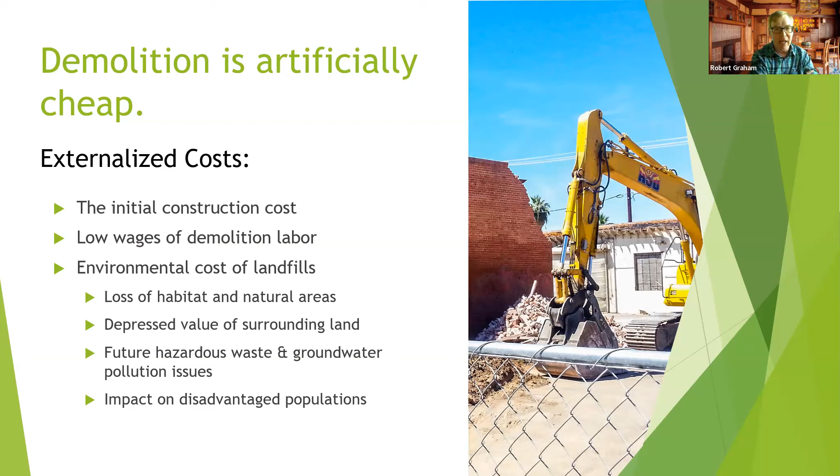So these are all societal costs that are not paid by somebody who says, I'm going to demo that building.

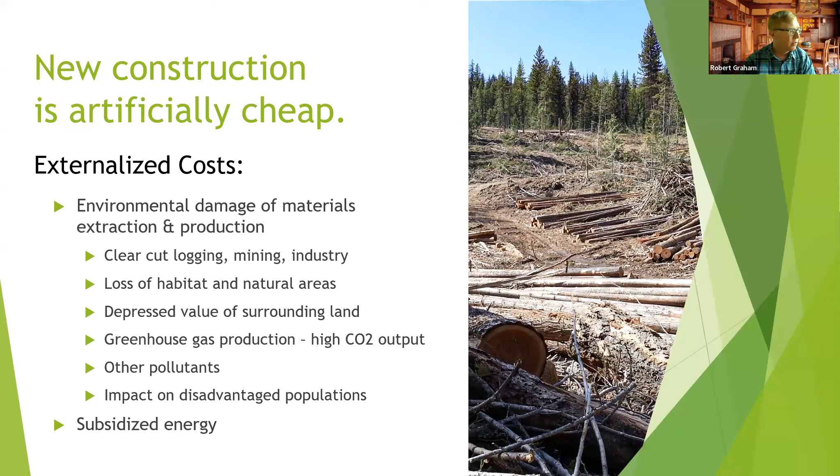It's paid by future generations. It's paid by people who are directly affected, negatively affected economically by these things going on near them. So these factors tend to underwrite the cost of new construction.

Our entire land use policy framework also is something that subsidizes new construction projects over existing projects. So we have an issue, of course, here in Phoenix, where way back in the 1970s large swaths of downtown got overzoned. By overzoned, I mean they were zoned for very dense uses that were not needed at that time.

That raises the cost of value, the value of the land, which makes the buildings that are on them less valued by comparison. When the land value starts to exceed that of the building, you're going to be incentivizing new construction over preservation, and incentivizing, once again, people to demolish buildings.

Densification, which is a perfectly laudable planning goal. Actually, that's one of the things we want to do to make a more sustainable city, is make better use of land.

But that has a side effect, as does all of the community development needs that we know. Those of us who work with city councils and politicians, we know that we have a housing crisis. We need to build housing. There are blighted areas that need to have reinvestment made in them. And cities need to have income to operate. And so all of these things, new construction is what fuels the furnace on those.

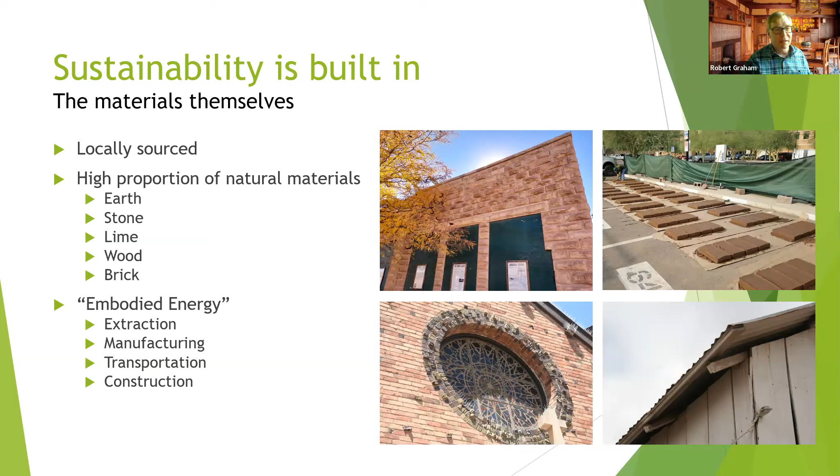Those things all have an enormous amount of embodied energy. So somebody had to cut that stone and make it into blocks, and somebody had to make those adobes and lay them out in the sun to dry. Somebody had to stoke the fires to burn the brick. All the work that it takes to cut slabs of wood to make buildings out of - that's all something that's already been done, and so that's in the building. To scrape that up and put it in a landfill just doesn't seem like a wise angle.

But it's important - these buildings all had high ceilings so that the hot air could rise in the room and make the livability of the space more comfortable. These tended to be thermal mass type buildings.

The buildings we build today are largely based around the idea of resisting heat flow. So lots of insulation - that's where you want to get your R38 roof and your R19 walls. Well, that's all an approach that has to do with trying to resist heat flow. The strategy in almost every historic building was not that. In Arizona, it was a thermal mass solution of delaying heat flow.

The idea was that the building would heat up overnight or during the day. It would take so much time for the heat to get through a wall that by the time the sun went down, it would re-radiate that heat outward. So this is the same phenomenon where you say, well gee, I walked into this old adobe building and it felt so cool. Well, that's because those walls are so massive that they never were able to really heat up during the day enough to re-radiate indoors - it re-radiates it outdoors when the sun goes down.

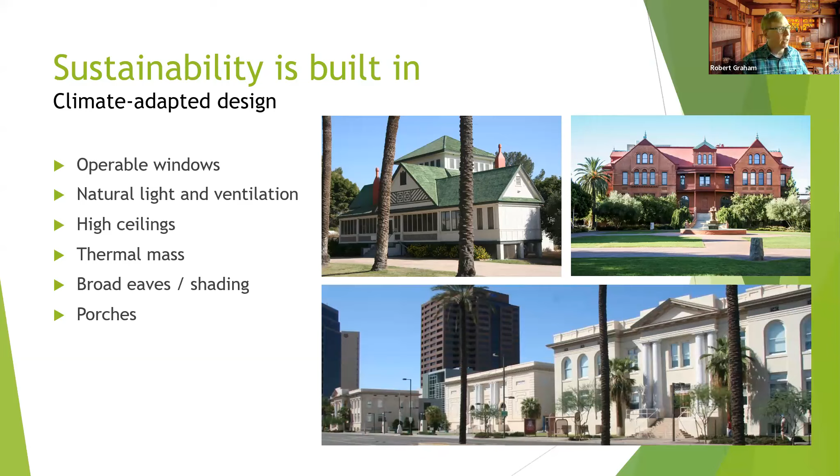Eaves, shading, porches - just a lot of good adaptive things, because if you were trying to live here once again, turn of the century or up until World War II even, these are the things you needed to do to be able to have a level of comfort in your city.

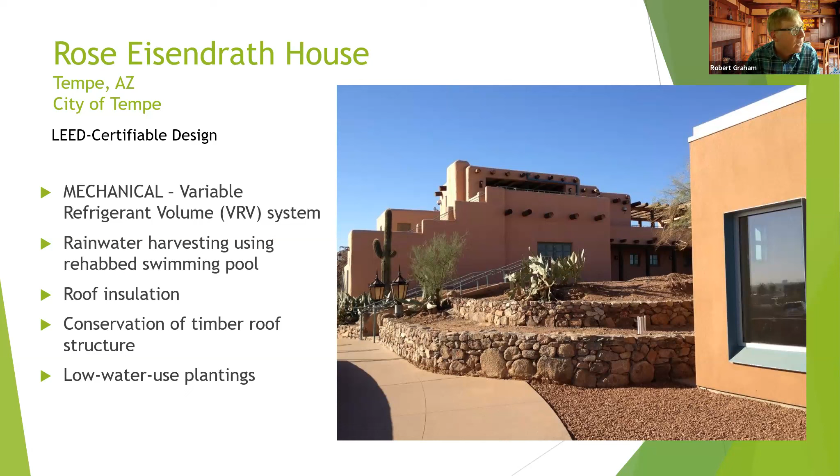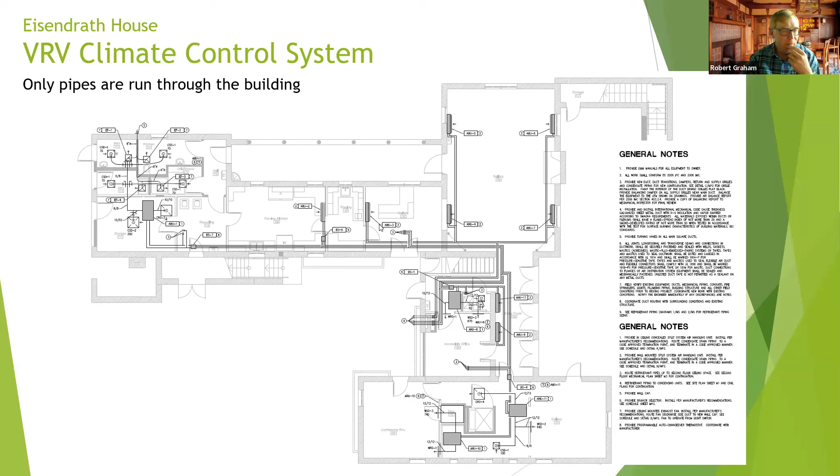We've used this system on at least 3 fairly major historic projects. These are extremely efficient systems because they even have the ability to pump heat around the building. If one side of the building, say the west side, heats up while the east side stays cool, the system can recirculate some of that heat through the piping, moving it around the building to make it more efficient, taking into account imbalances in the system. They are expensive, but it's often worth it.

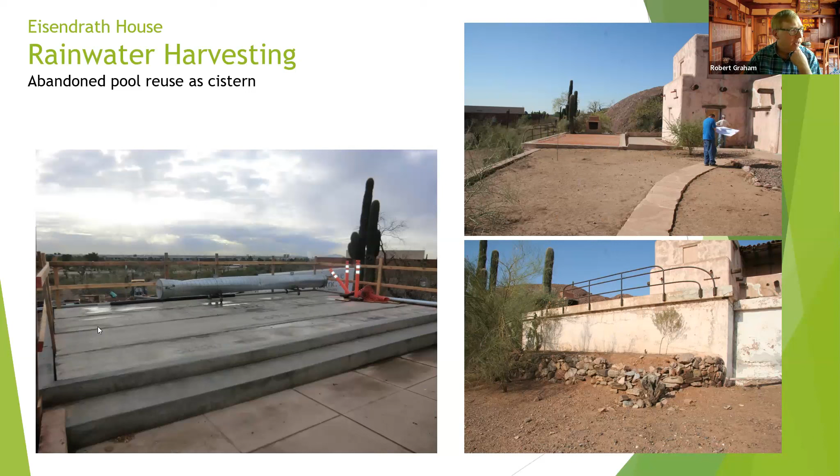We use rainwater harvesting too—how do we irrigate the landscape around this sustainably? This building had a swimming pool that had been filled in for years. On the lower right slide, you can see it's a raised swimming pool on a terrace; the upper slide shows the top of it. This orange paver material is the infill they did in the pool. We excavated that out, lined it so it would hold water, put a cap on it and a pump system, and now all the runoff from around the building and off the roofs goes into this old swimming pool before draining off to the landscaping.

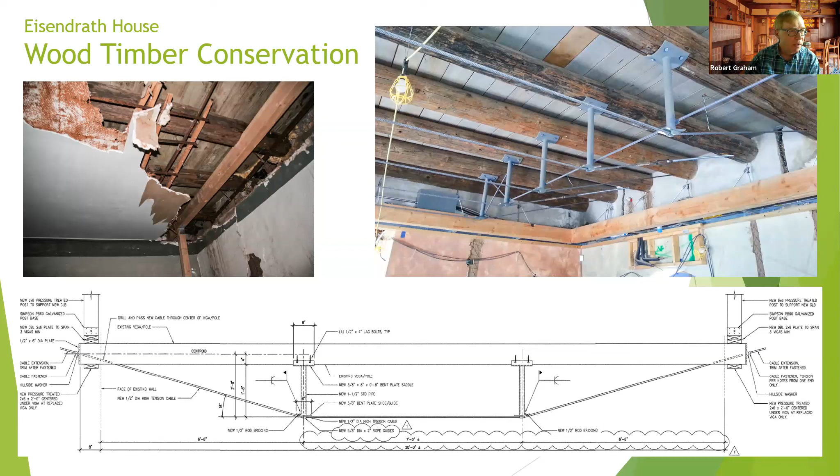We went to some unusual lengths to preserve rather than replace roof timbers. These were all undersized for the new use. We had a change of occupancy, which required higher structural loads. So we were able to reinforce what was up there with a fairly creative system of steelwork, preserving the original material and saving all the work and expense that would have gone into taking them out and replacing them.

We did some energy modeling on it, and things like that. A lot of the little LEED things you'd have in the LEED system list were actually fairly easy to achieve. But some things were not so easy to achieve—this was a roof that was on the edge of being thrown away.

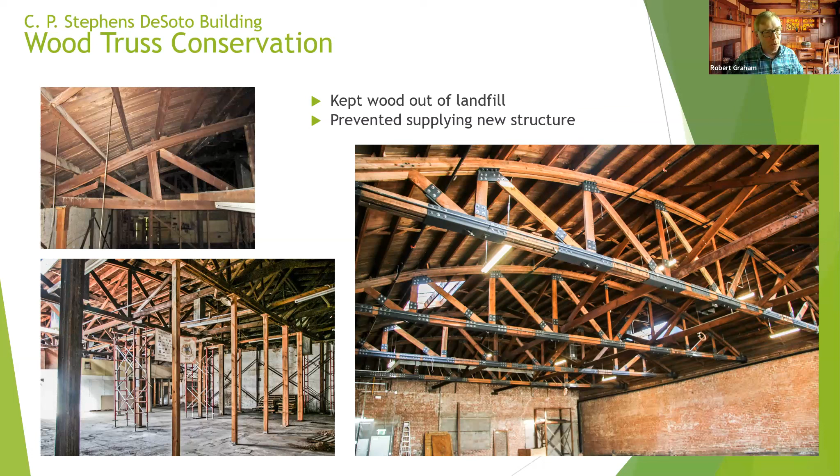But we were able to find a way to put those things back together and reinforce them with some supplemental steel. The problem with the trusses wasn't the individual members, wasn't the wood—the problem turned out to be the connections. So we found a way to reinforce the connections with lots of bits of steel, which saved all this original material, as well as the material that would have gone to landfill and the material that would have had to replace it.

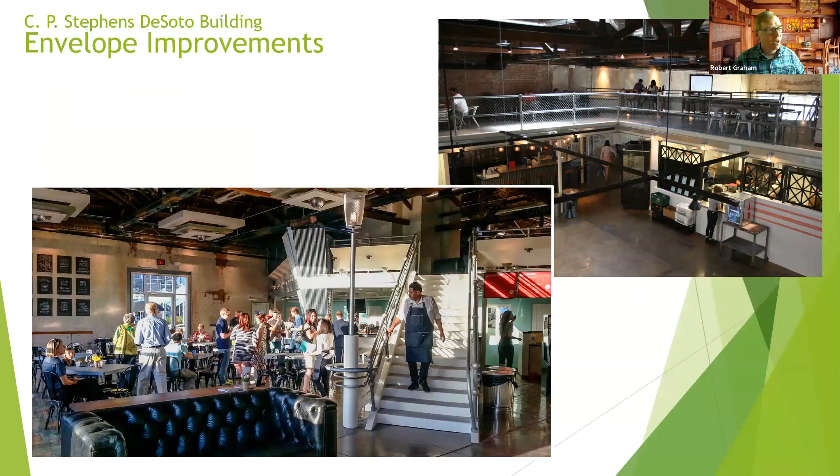Again, this was a similar situation to 22 Jackson. The exterior envelope—we were able to do all the insulation on top of the roof, so we could preserve that interior look. To cover up the interior walls in this building would have been a sin. They were just dripping with character and age.

So my essential message is that preservation is the ultimate in sustainability.

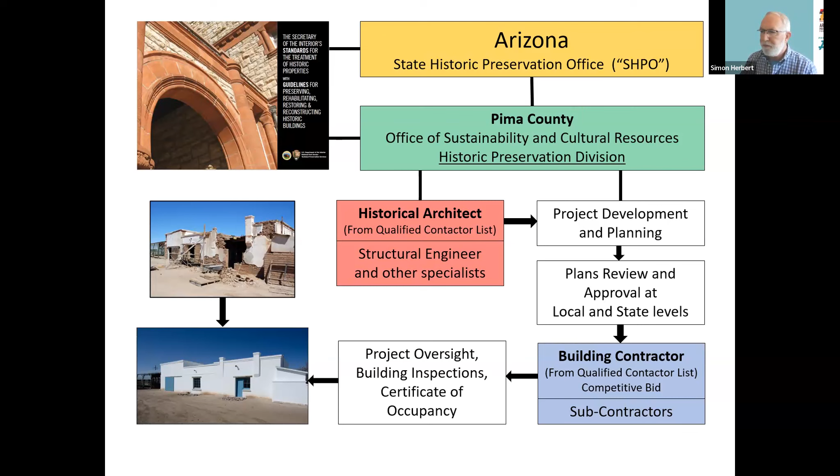Canoa Ranch, as mentioned, was a really rewarding project. This shows a set of buildings at the ranch that were completed roughly, I'd say, 2008, 2009. So this is not a recent photograph, but I like it because it shows what the buildings looked like pretty much upon completion.

It goes back a long way in history - it's an 1821 Spanish land grant, so this is even before Mexico was Mexico. The existing buildings date from almost the turn of the century, late 1800s, to the early 1950s.

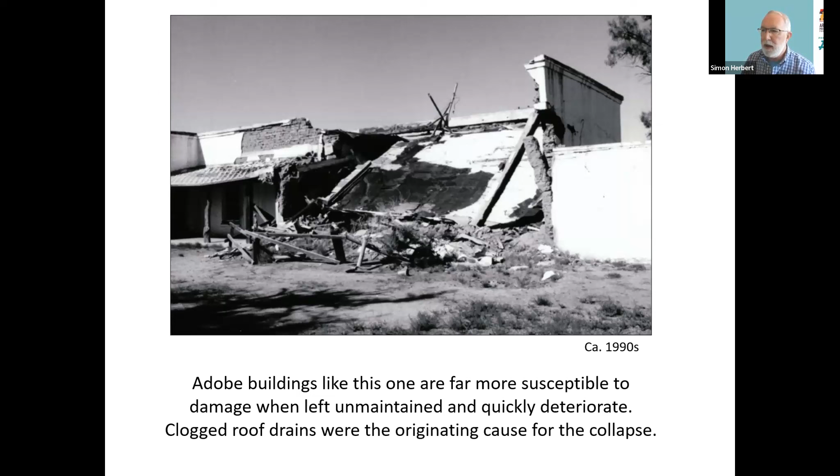This was taken in the 1990s, and it shows part of the building you just saw in a state of collapse. It didn't fall down by itself, but lack of maintenance brought it to this condition. As typically happens with buildings that are not attended to or maintained, water does damage - in this case, clogged roof drains. The water built up, it leaked, the adobe got wet, it couldn't support itself, and the roof collapsed onto the building, and it ended up looking like the top photograph here.

The remaining wall was braced temporarily until work could actually take place. The roof from here is gone. This wall is partially missing, and it's missing all the way to here.

The team had to do extensive research to determine the best approach. I always like to point out that the architects and the county team working on this were very open to listening to the contractor who came on board, and they were able to come up with very creative solutions for tying old and new walls together. Incidentally, these were also adobe, and the windows - you can see an old one over here - the new windows in this case were replicated by the contractor's carpentry shop, and they did a very, very good job of copying the original method of construction. They don't have insulated glass, and they're able to maintain the true divided light in the window with the right thickness. I really wanted that to take place.

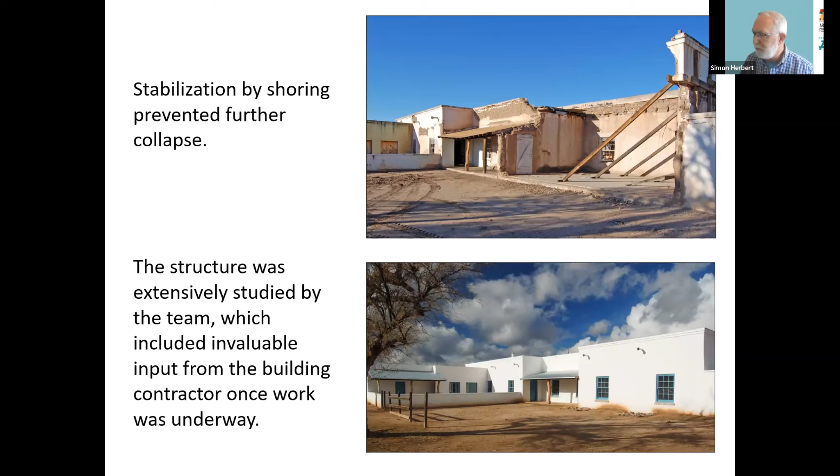Here's another building, also the victim of clogged roof drains and roof collapse. Another adobe building, this one from the 1950s, and actually the last building to be constructed at Canoa Ranch. You can see the original adobe wall here and the new adobe wall being constructed by the contractor.

The bottom photograph shows what it looked like upon completion. Right now, there's an air conditioning unit that sits outside here, and this patchwork of stone covers the entrance to a dry well. There's a roof scupper right here. The water shoots off, lands on the stone, and travels underneath to a dry well where it dissipates. They haven't introduced water collection at this point, but that may happen in the future.

Incidentally, the building was constructed with metal frame windows. You can see them here and here. We found that these were constructed by the Torrance Company in California, and so the architect and the builder simply went back to Torrance and said, 'We need two more like this,' and they made them exactly as the original ones had been made.

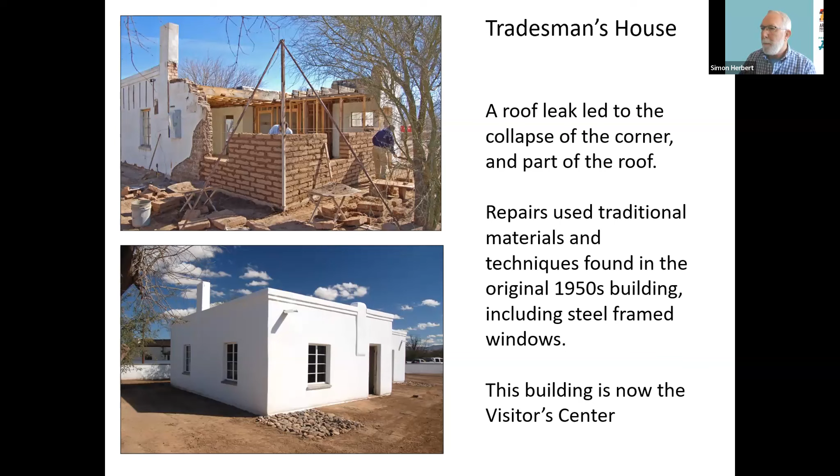The need for making adobe, obviously with this amount of damage, was huge. And the original adobe had been made from dirt on site. They'd simply gone out to a suitable location, brought the dirt back, mixed it, added straw, and there was a great variation in quality.

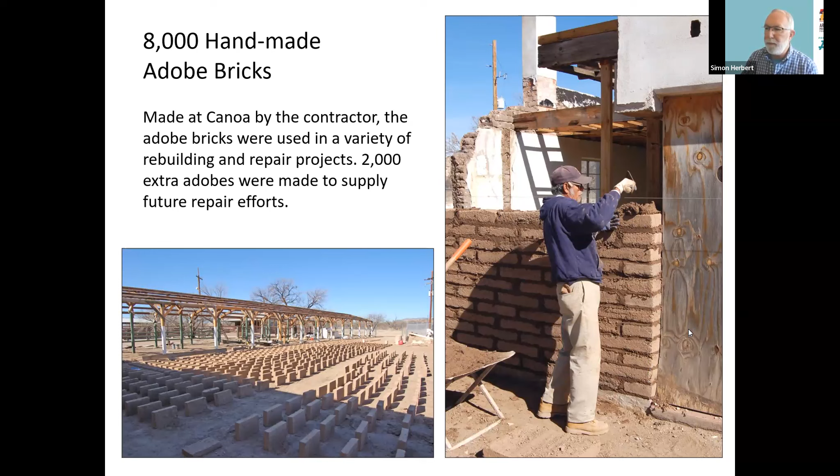The state of the buildings when first seen was really depressing, but by carefully dismantling areas that were fragile or broken and then reconstructing them, the building came back relatively quickly into a stable condition.

The thing about these buildings made of adobe is you can't just let them sit because you've repaired them or restored them or rehabilitated them. There needs to be constant monitoring of systems to make sure that things aren't going awry again.

Because it had been decided to use the same dry well system, right in front of the door is this area of boulders over a steel grate that nobody can actually walk on. It's too dangerous. So I put a walkway of steel over that and rearranged the rocks to try and hide it. But I would have suggested moving these drains to a different location, maybe one over here and one over here, to redivert the water in a safer manner.

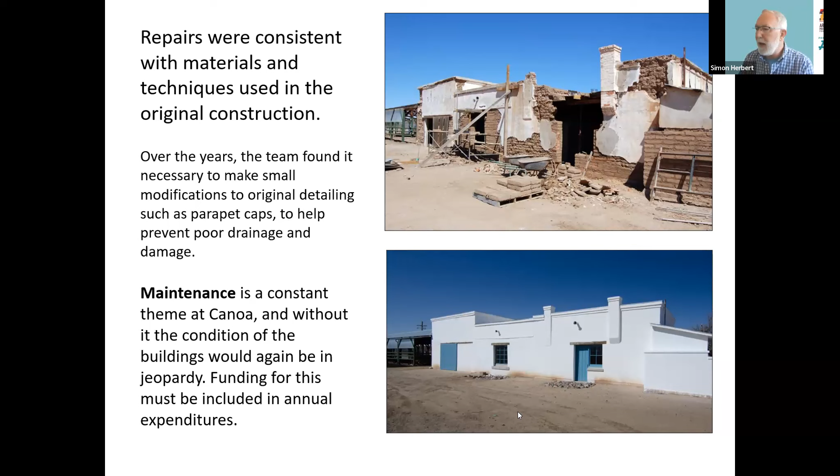The adobe site walls, very important for the ranch because they help to keep cattle, which were moving from the ranges and grasslands into the corrals, from getting into the gardens and the houses. So the site walls formed a very important job.

Most of them were in some state of disrepair, some in total collapse. So there was repair and rebuilding that went on, and all of them had to be recoated with lime plaster. We worked with David Ubetta, formerly of Tumacácori in the National Park Service, who advised us on the kinds of mixes.

They even brought National Park Service teams to the ranch to help show us how to make use of these traditional materials, which are very sustainable.

Again, recoating the walls is important every couple of years, and we were getting all manner of problems from water infiltration that occurred because of this concrete lip. The concrete was original to the walls, but they did not have a drip edge. So where we replaced the concrete caps, they included a cast drip edge in so it would shed the water before it got into the top of the wall and then damaged it further.

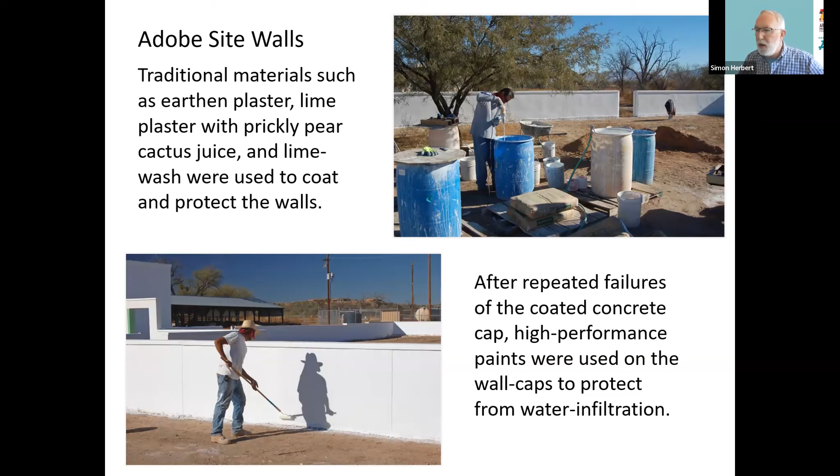What I'm trying to say here is that there is a real process of learning when dealing with historic buildings.

One of the most important things is working with lime, which you may have seen in your travels in the preservation world. The lime cycle begins with limestone that's crushed and heated to around 1200 degrees, which drives off the carbon dioxide, giving you quicklime, a very white-looking stone, but not limestone. When you add water to that, it gives off a tremendous amount of heat, and you end up with hydrated lime, a paste-like material. When properly aged, hydrated lime is used as a mortar, an additive, or a lime wash, and air and carbon dioxide get back into it, so you end up with a very hard material similar to limestone itself. It's a tremendously sustainable, very traditional material, not easy to work with, so it's not often used for modern buildings, but extensively used in restoration work.

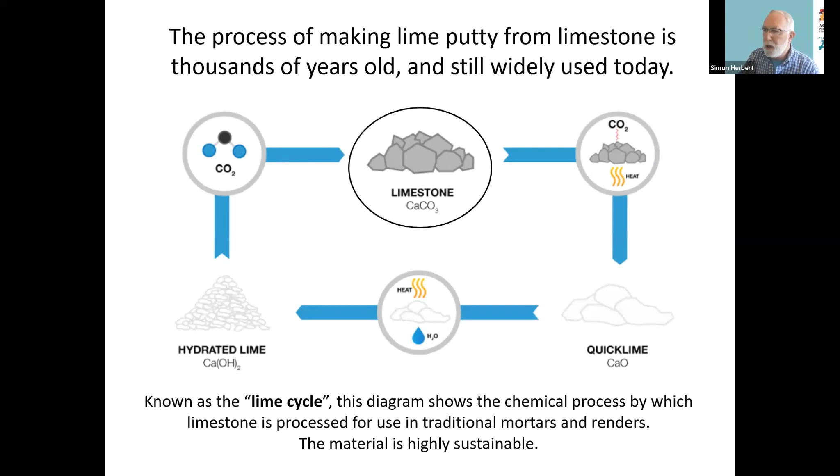The cementitious coatings on this wall were removed and replaced with lime plaster and lime wash. The windows, which we evaluated closely, were deemed too far gone, but we kept them in storage, and new ones were made which replicated them along with new frames.

The color of the doors was white initially. We changed that to blue when we had photographic evidence to determine what they should look like. All the original hardware holding this door was taken down, the roller bearings were flushed out of sand and dust and re-greased, and the doors worked just as they should, if not better than when they were built.

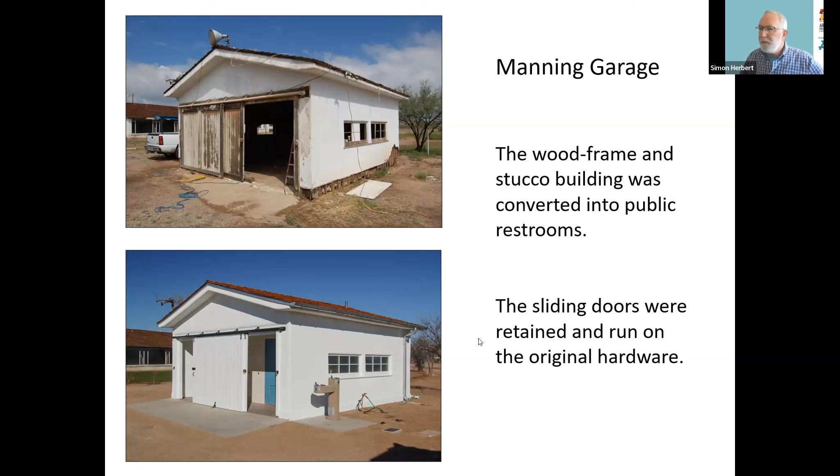Some of the interior projects I worked on with volunteers were in the main house. I'm not going to show you an overall view of the house, but it was expanded around 1948 when the owner's son married and he and his wife moved in. They created a dressing room for both of them, a massive space with 32 drawers, most of which had been chewed through by pack rats.

This gentleman was a retired engineer who lived in a community with a carpentry shop. He would bring in little strips of wood used as replacement runners in the drawer slides, available in 2 millimeter thicknesses, so we always had a supply to draw on. Together we used wood epoxy consolidants to repair wood, then repainted to match an early paint job and color scheme used in this room. Interestingly, if you look at this slide, these are all battleship gray. These were repainted to what was originally the color for the entire room.

We surmise that because of the end of World War II, there was a large amount of navy gray paint surplus, and they probably got a good deal on it, because we couldn't imagine young Mrs. Manning choosing battleship gray for her own dressing room. But it was an extensive repair project that ended up being well done.

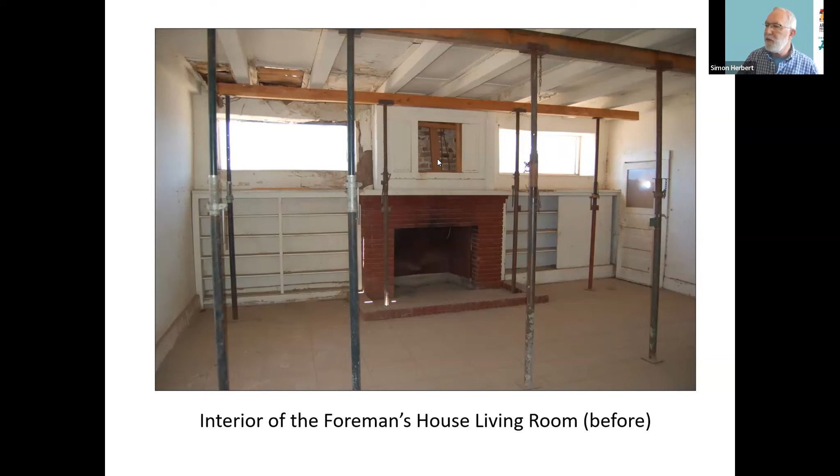The reason for the columns and supports was to prevent these beams from working their way downwards due to gravity. And somebody in the past had actually got a 2x6, which is seen here, and jammed it up right underneath this beam, and it rested on the fireplace, which had a little sag in it due to the weight redistribution.

So SHPO agreed with us that the window should be infilled, so it shows them now infilled, and the woodwork was removed after careful documentation, numbering, taken back to our shop, and that's where we rebuilt it.

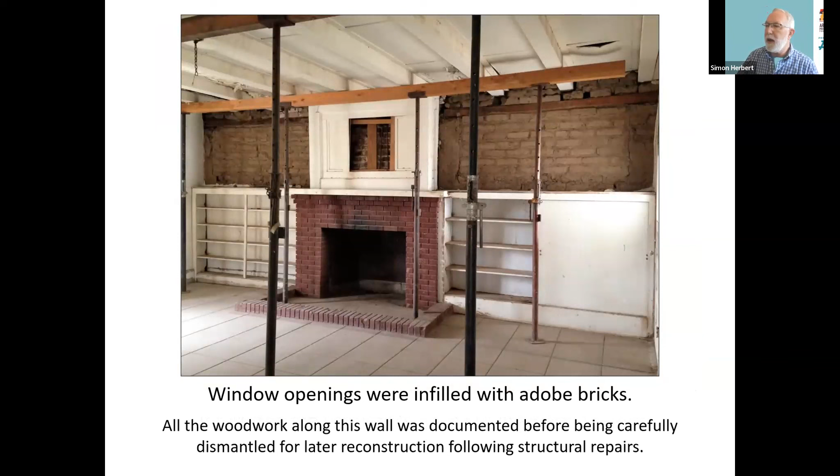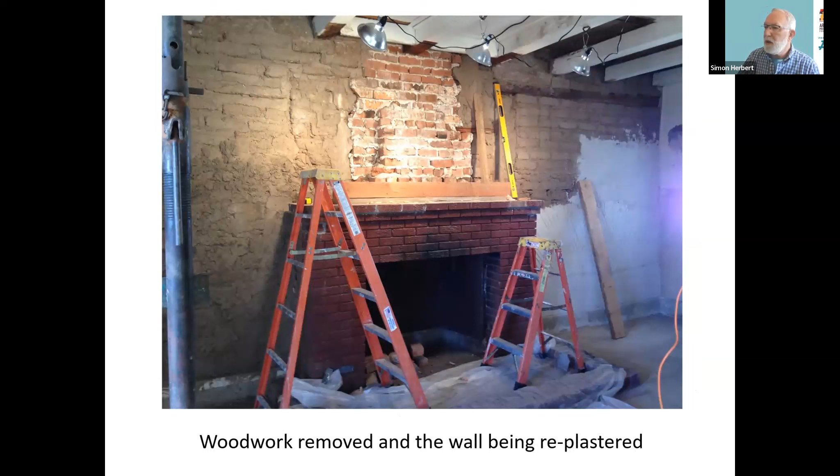Replastering of that same room in lime plaster, lime wash. I came up with this structural device to re-support three of these beams which needed help, especially the center one. So we used recycled lumber from other projects, placed on top of the fireplace so that we have good vertical support. And then after putting things back, it started to take shape.

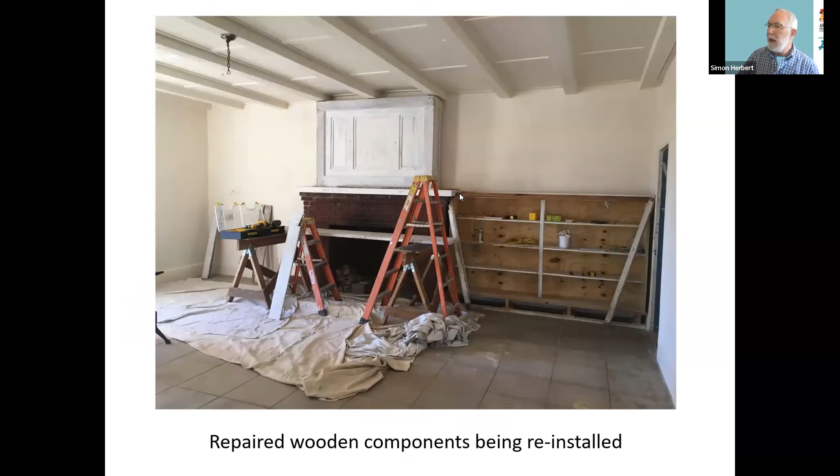This is the original wood put back in place, a new mantel with electrical points built in, and the rebuilt bookshelves created this space in the living room. I was very happy with how this came out at the end.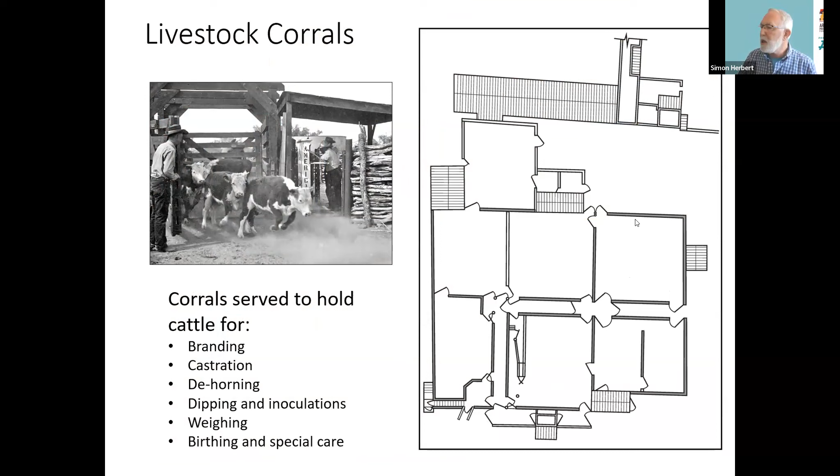The livestock corrals at Canoa are made of mesquite wood, and their design is traditionally called retaque, which means to stack up. The fences weren't used to hold cattle other than for the list shown here, which included branding, castration, dehorning, and so on. But you can see the extensive network of gates and fences.

I came up with a conservation plan for this after numbering and lettering everything that we had, so we knew if we took a gate off where it went back, for example. But we had 1,200 linear feet of retaque fencing to repair or replace, and 52 gates.

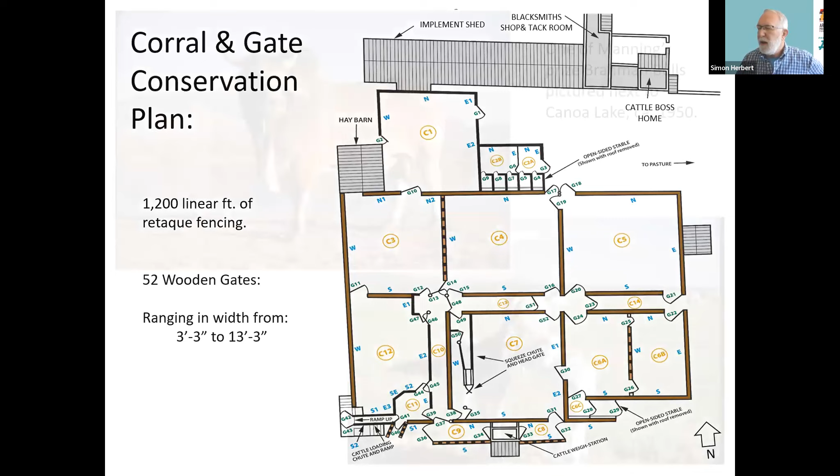The reason for the size of the retaque fences was for bulls and other cows like this one, very large and heavy, and they had to be big enough to resist them wanting to get out. If they were out on the open range, the first thing they wanted to do is not be in a fenced area.

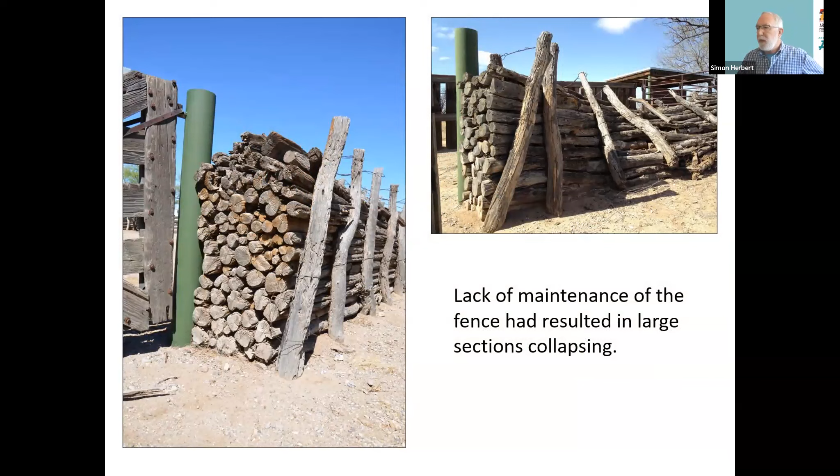Lack of maintenance again had led to collapse and disintegration of many areas of the fence, and we had to understand how they were built and how to repair them. This shows just a cut-through diagram of a typical fence detail.

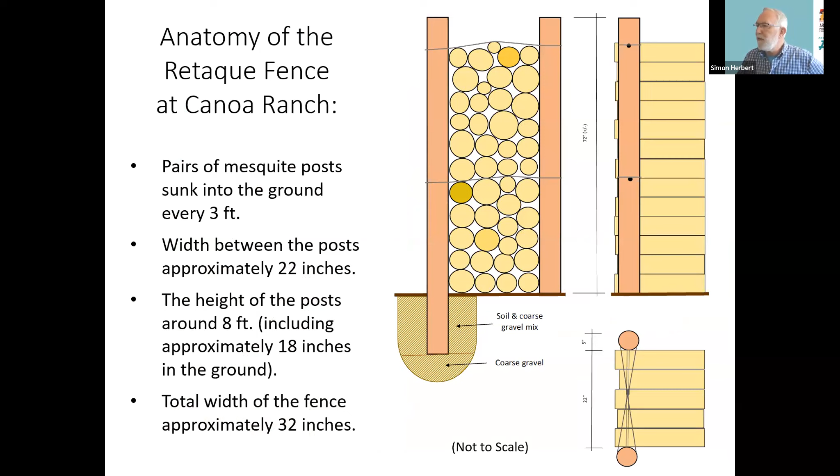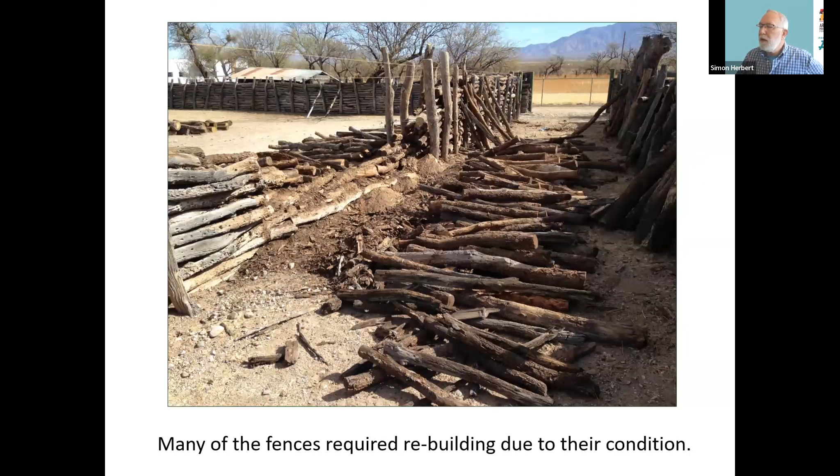Very hard, nasty work, very dirty. Here is a fence being dismantled ahead of reconstruction. New posts had to be put in. Here are the gate posts with string lines running on the inside to show where the new posts would go. We started using a machine auger attached to a tractor to dig the posts, but it was so cumbersome and slow that we resorted to just digging everything by hand, and it went a lot quicker.

Here is a complete section being rebuilt, and here is a reconstructed part. The part from here down to roughly here is original. Everything else is reconstruction.

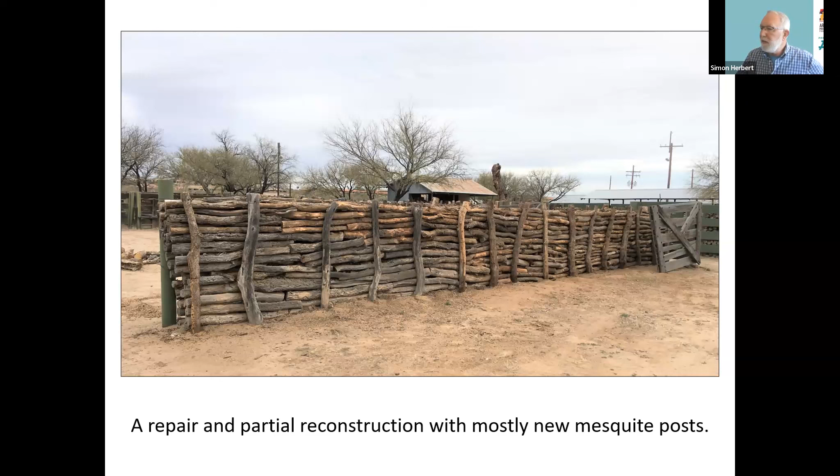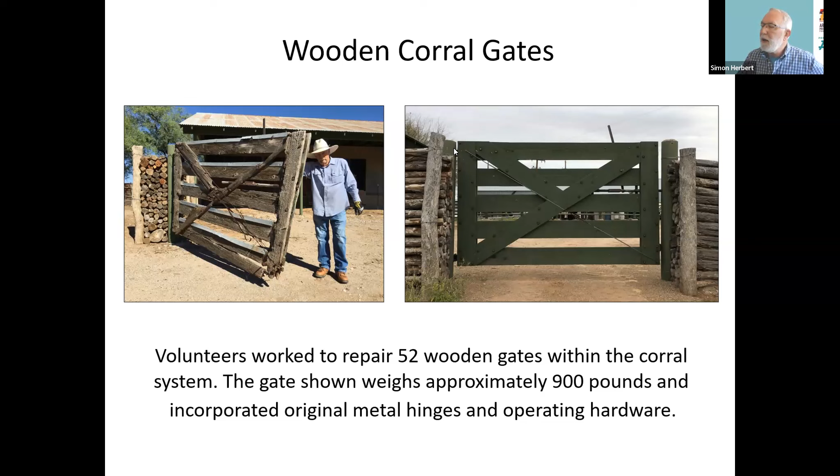This is one of the 52 gates that was reconstructed. The only thing we did differently was install a turnbuckle steel rod on the outside on both sides so that we could keep the gate from sagging, but everything else was the same. All original hardware and locking mechanisms, but all new bolts, since there was no way we were going to reuse the old ones; they were just too damaged. We then rehung it on the original hinges, and they worked very well indeed.

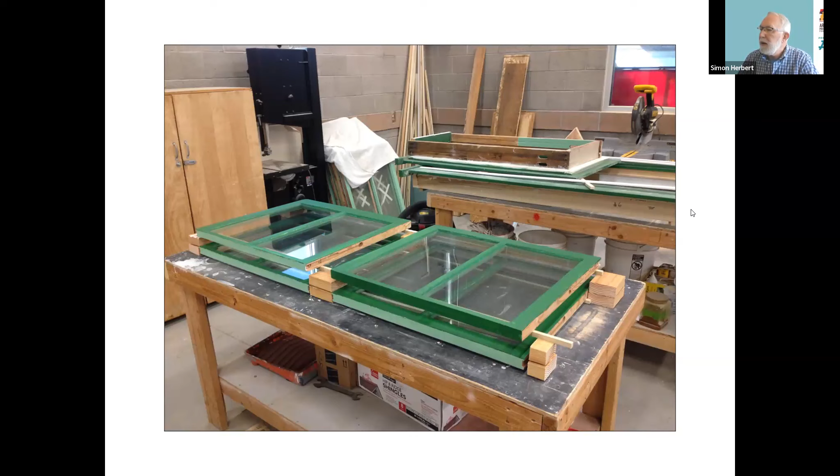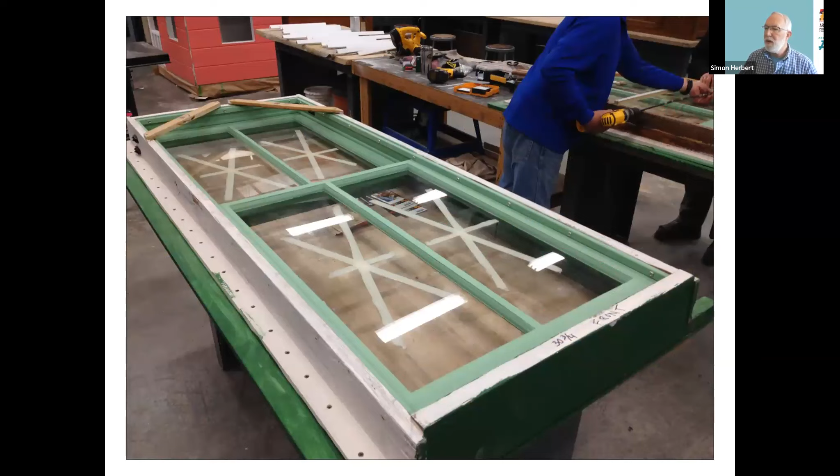I'm not going to go into the whole detail of how we did this, but here is one of the larger windows ready to be reinstalled. Everything is numbered and braced for moving. The tape is on here to remind people that there is glass in there. We weren't allowed to put back single pane or double strength glass—it had to be safety glass because of this being a school, which added weight to the windows.

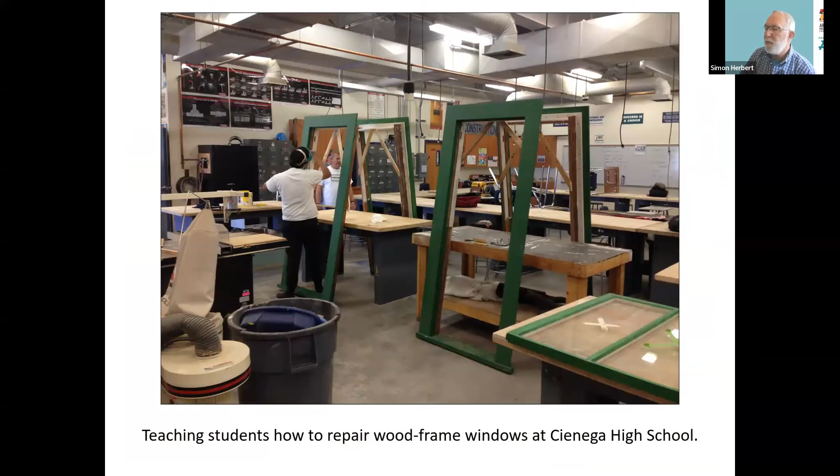But the students were remarkably good in helping, and the staff were also very helpful. We pretty much occupied the shop for months doing this.

The hardware was taken off and stripped of paint, repaired, repainted, and then re-greased so it could be installed. The students are working on a bench with a member of the staff.

Current project I'm working on is for Valley of the Moon here in Tucson, working with them as a consultant. Last year, I completed 3 reports on the 3 main complexes. A very unique 100-year-old set of structures built almost completely by one person with little building experience or knowledge, creating challenging buildings like this one. It's called the Cathedral, made out of thin shell concrete.

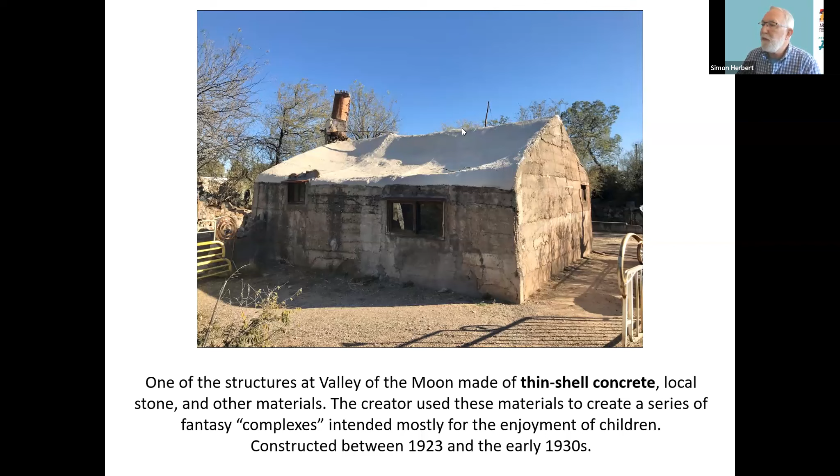So the structural engineer is currently reviewing the best way to deal with this, but very likely there will have to be a different system in place that preserves the exterior walls, but allows for a roof to be flat the way it should be.

Over the years, a little forest of supports have grown up inside that room to keep the concrete from actually pulling downwards and tugging the exterior walls inwards and destroying the building. So this is one of the big challenges we're facing on this one.

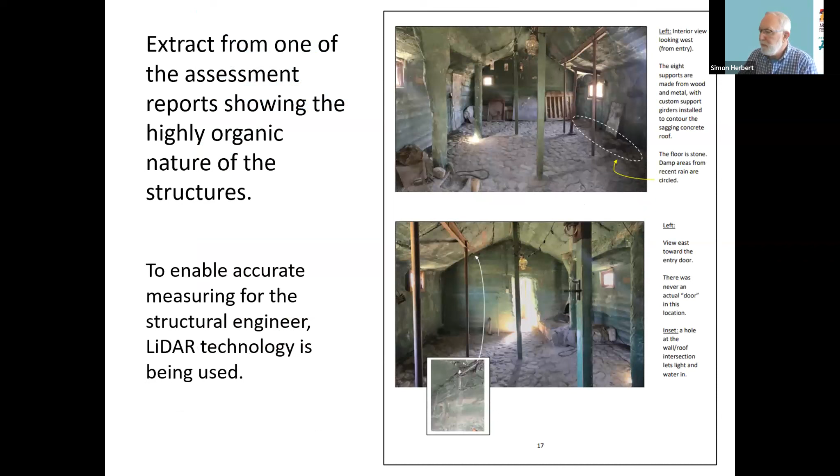Unfortunately, the states of Jersey who owned the building wanted to demolish it. And I went to school with a man who became a reporter and then a filmmaker and an ardent preservationist and politician locally on the island.